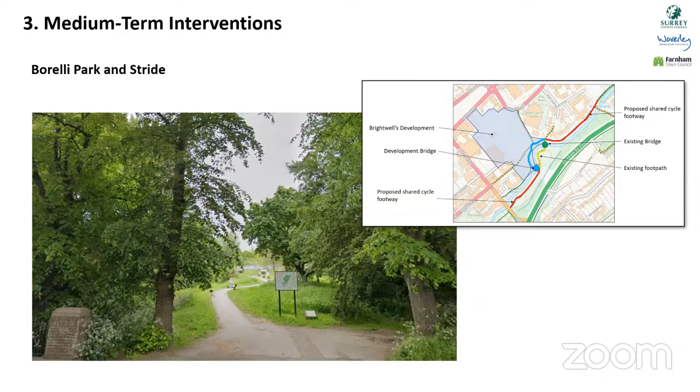Thank you. For those who don't know me, my name is Duncan Knox, Road Safety and Sustainable School Travel Team Manager, and it's the mission of my team to reduce death and injury on Surrey's roads and promote more walking and cycling to school. We are currently working on a review of our 20-mile-an-hour speed limit policy, and we'll be bringing a report to Cabinet in the next month. That's as much as I could say about it at this time.

Yes, I'd be interested. There will be some proposed changes to the way that the scheme operates, and they will go through the regulatory process first, through the council or through cabinet. But I think what Duncan is saying is that there is a much wider review now of the rollout of 20-mile zones across the county, and I'm sure that Farnham will be included as part of that review.

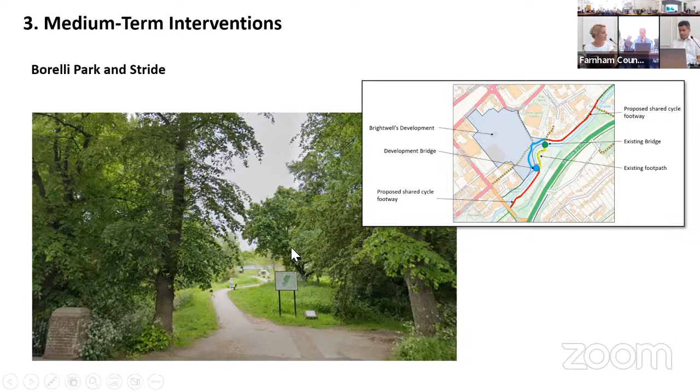Does that mean a revised planning application for the bridge will be coming to Waverley at some point soon?

Yeah, it's being discussed with Dawn White, but I don't think she's online. She's online, so it's more Dawn who can answer. So yes, we've seen some recent designs, and I know Farnham and Waverley have reviewed them as well. We're hoping that it will be a revised application coming forward.

Yeah, I think that's another conversation. It's slightly complicated around the planning basis, and commission. We would need various boundaries around that conversation in the future. But I know that local parties are interested in the final design of that bridge, and we're working towards that solution.

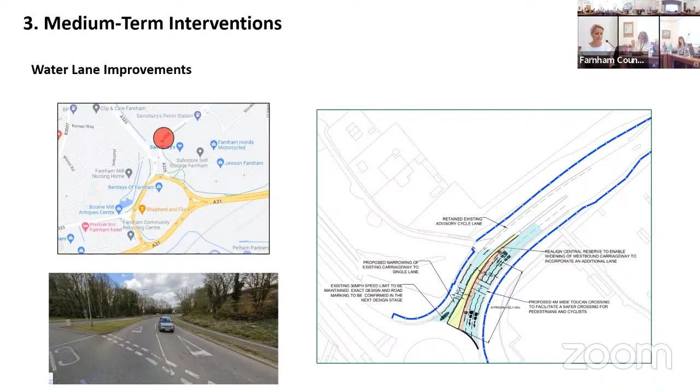Thank you. Okay, so swiftly on to town centre improvements. The team in the background have been working really hard on a lot of activities since the last board. We were tasked with carrying out some modelling on the options being outlined. Since then, we have redesigned the Brightwell development drawings for the East Street section 278, and they've been passed over to the planning teams. We also carried out design of key junctions, which was the purple area of the plan discussed at the last board.

We carried out some strategic traffic modelling on options, the hybrid options V and Y, and we've also carried out some microsimulation modelling, which is the close and more detailed modelling of the hybrid options. The teams are going to discuss their findings shortly.

But I'd like to start by drawing your attention to the optimised infrastructure plan and the vision that the people of Farnham signed up to. The key objectives of this were to rapidly reduce carbon emissions, ensure well-connected communities, support the economic vitality of Farnham, and improve the quality of place. As a reminder, nothing's been done in Farnham for a generation, and this scheme is making the town a better environment for the future generation and the climate challenge that we have.

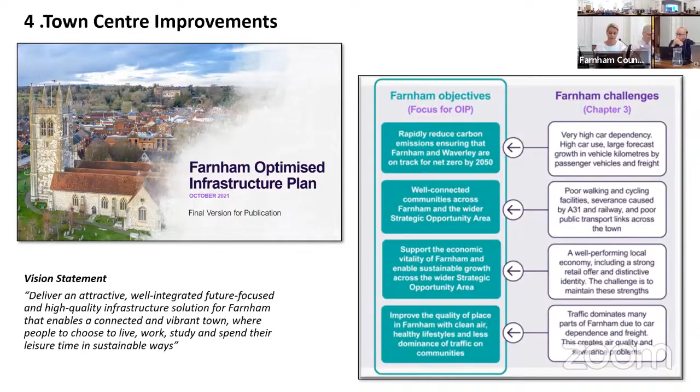As a reminder, the Surrey Local Transport Plan, also called LTP4, was adopted in July 22, and it has a hierarchy of sustainable travel with prioritisation of walking and cycling over less sustainable modes, such as a car. I will now pass over to our design team and our modelling teams to give a brief insight into the design and modelling outcomes.

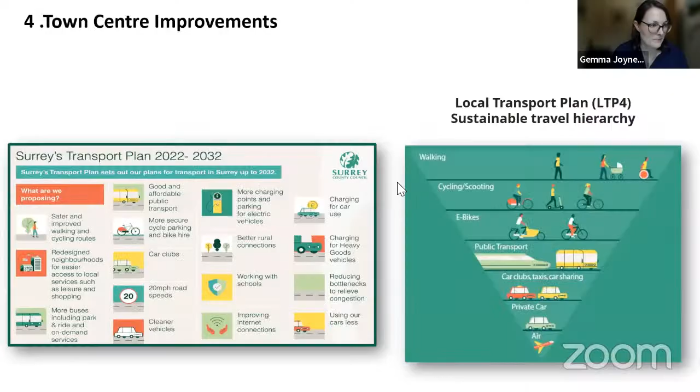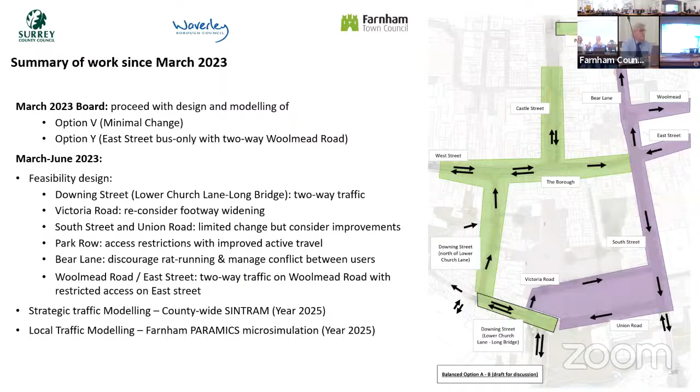Okay, thank you. So I will pass over to Gemma to talk about the strategic modelling shortly. But to start off with, just to summarise what has happened since the last board, I think Elaine's covered it in part, but just as a refresh.

So we were asked to look at the design and modelling of two options, V and Y. V was called minimal change, perhaps a little bit of a misnomer, but minimal change perhaps on South Street and Union Road, but change on Victoria Road, East Street, and around the Woolmead Junction. And Y was the option whereby there would be a two-way Woolmead Road, and East Street would be buses only, although we would still have delivery and servicing vehicles on East Street as well. So just to recap, those were the two options.

So in terms of design, what we've looked at is making the section of Downing Street between Lower Church Lane and Longbridge two-way working for traffic, instead of one-way as it is now. Reconsidering the footway widening, or providing the footway that's missing on the north side of Victoria Road, to provide better connections between Brightwells and the rest of the town. As I said, looking perhaps at limited change on South Street and Union Road, but considering what could be done at the South Street Union Road junction, to look at access restrictions and improved provision for active travel on Park Row, to also address some of the safety issues there with vehicles and listed buildings.

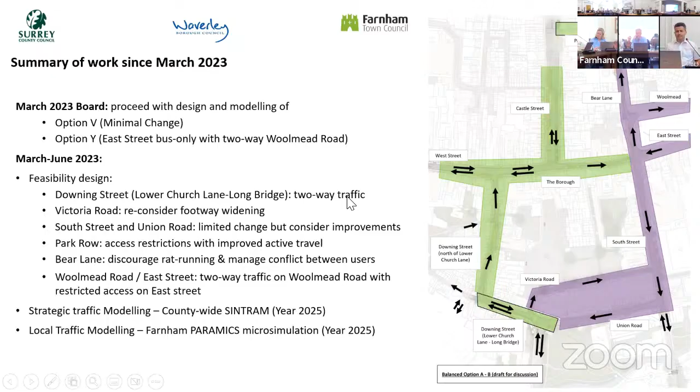We move to the next slide, please. I'm going to touch on the design. So we're going to go through design and then the two different types of model. On design, I think the drawings have been distributed to board members already. So if you've had a chance to look at them, perhaps they don't come across too well on the slides, but I'll just cover them anyway.

So on the left-hand side there, we are showing Downing Street, Union Road, and Victoria Road. So what we've got there is the new two-way working that allows people to come to and from the Wagon Yard car park in the direction of Longbridge. We have Victoria Road with footway widening and a new piece of footway, because there isn't one at the moment, on the north side of Victoria Road, which connects the car park and opens up the rest of the town centre. We have a new junction, so traffic lights at the junction of Longbridge, Union Road, and Downing Street.

That's traffic lights with some crossings for pedestrians, particularly at Longbridge and Union Road. And we have a minor improvement at South Street, Union Road, which is to ease the turning movement for large vehicles from South Street into Union Road. Because at the moment, I think that's where the guardrail gets hit, not destroyed, but impacted. So that should help from a safety point of view.

We've insisted on putting traffic lights there because we've had feedback from consultation that we should essentially put the lights in. If we move to Park Row and Bear Lane... just check whether anybody's got any questions or queries. Okay, I'm happy to be stopped if I'm moving too quickly.

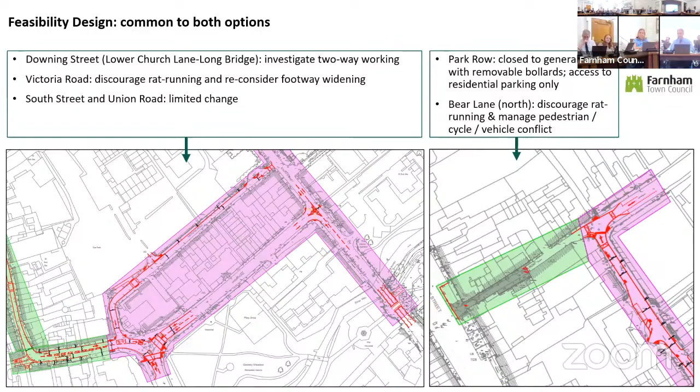Right, sorry, the next slide then. So the previous slide was showing elements of the comments about options V and Y. This slide is showing essentially the differences between V and Y. So V, as I said, retains the one-way traffic on Woolmead Road and retains, pretty much all of it, the East Street redesign that was put together for the purposes of section 278. So we've looked at how that ties in to the proposals for Woolmead, with the footway and improved crossings already developed there.

So that's option V. For option Y, we have looked at how to make Woolmead Road two-way, the changes we need to make to accommodate two-way traffic on Woolmead Road at the junction, and the changes at the other end of East Street, the junction of Dogflud Way, where we're proposing traffic lights with crossings for pedestrians. Again, trying to retain as much of the East Street section 278 scheme as possible, which pretty much stays unchanged, but its use changes because it becomes buses only with some delivery and service vehicle access. So the traffic change will be substantially bigger.

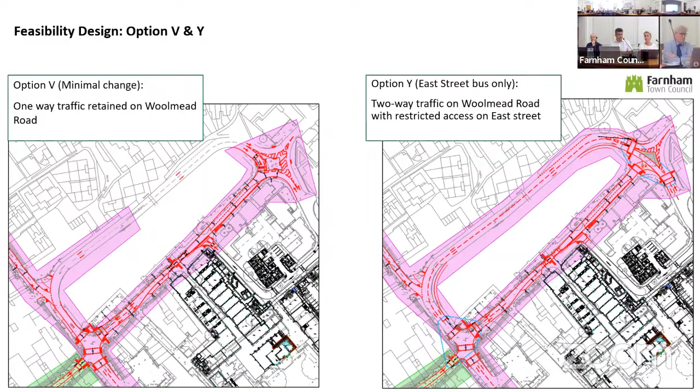Okay. If we move to the next slide. So the final thing to say on the design. For the last 3 months, we've effectively been looking at design, it feels like, for half the town centre. Because we've been looking at Downing Street, South Street, Union Road, East Street, and Woolmead Road.

Of course, we still have the proposals for the rest of the town centre, which is the main part of Downing Street, the Borough, and Castle Street. So it's just really a reminder of that, using some of the images that we used for the consultation to say that overall, what the hybrid options are

giving us are those wider pavements for pedestrians, particularly to help people with wheelchairs and pushchairs, new and improved crossing points at various places, including here at the top of Downing Street, raised crossings at various streets, loading bays to make sure that loading doesn't block traffic as far as possible, and planting, greening, outside dining, and seating. And the last one, I think, is those

shorter driving routes for people from North Farnham to get to the Hart car park and South Farnham to get to the Waggon Yard car park, because we've made part of Borough two-way and we've made part of Downing Street two-way. As well as shorter driving routes, that helps us reduce the level of traffic on parts of the current system. People don't have to go all the way round; they simply get a shortcut that way.

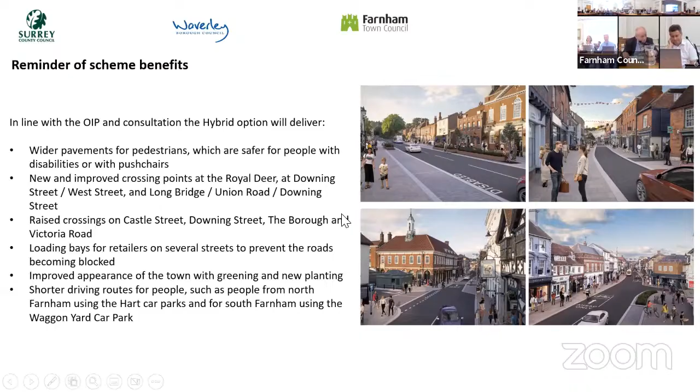Okay, Chris, was there anything else you wanted to add? No, thank you, and it's generous. Yeah. Totally. Hey, Gemma, you're on. Hi everyone.

So transport models provide a lot of information, and the following slides that we're going to present provide an overview of the results which best illustrate the potential impact of these options. We're using the PM peak as an example because it has the greatest increase in delay with the options. Here is the predicted change in traffic flow in 2025 along key routes from the SINTRAM county-wide model.

The red and orange colours denote an increase in vehicle flow in option V compared with no scheme, and the green colours show a reduction in vehicle flow. Orange and bright green show a smaller change in vehicle flow of within 60 vehicles per hour. It can be seen that the biggest changes to vehicle flow are in the town centre and along the A31. Further afield, there is route switching as a knock-on impact of the changes to the town centre and the displacement of traffic, the majority of which, however, produces a net change of less than 60 vehicles per hour.

In the town centre, there is a general reduction in vehicle trips, especially the Borough, that sees approximately a 40% reduction. Any increases in the town centre relate to where new routes are available. For example, the westbound carriageway between Castle Street and West Street, which introduces two-way travel in this option along this section. The A31 absorbs some of these displaced vehicles, with increases of up to 15% in the eastbound direction during the middle of the day and during the PM peak.

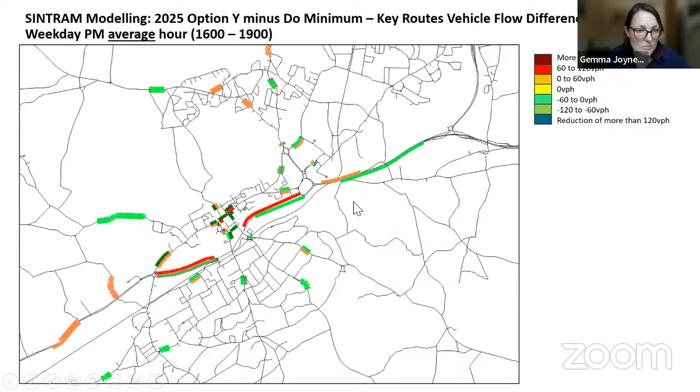This slide presents the same, but for option Y compared with no scheme. As you can see, the vehicle flow difference results in 2025 for option Y are similar to option V, with the exception of Woolmead, which enables two-way travel in this option, and thus seeing an obvious increase in trips in the westbound direction, and a reduction in vehicles travelling along East Street due to this section of road being restricted to buses and access only. In the AM peak and during the middle of the day, there are more vehicles using the bypass in each direction, but the differences remain localised.

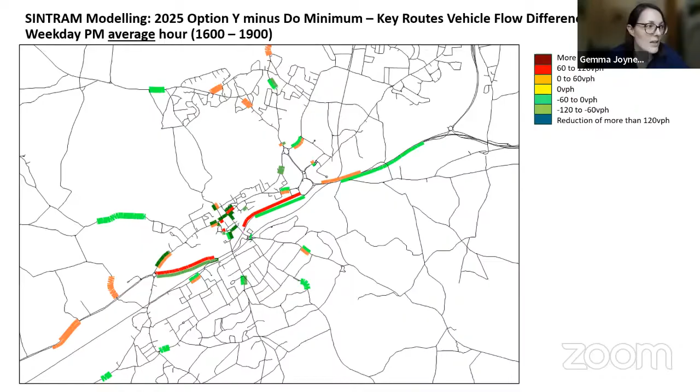The SINTRAM model also enables us to estimate the impact on travel by other modes of transport. It is estimated that bus passenger numbers will reduce by a small amount due to increased journey times, although they reduce less in option Y due to East Street being bus only. And the model does show more people will walk and cycle with the options. Next slide. Thanks.

Okay, thank you. You can be back with me because we're now going to cover the more local Paramics modelling. So the two sets of modelling are not done in isolation. The predictions in terms of what happens to the traffic that Gemma's just spoken about get fed into this modelling, which then predicts what happens at the various junctions in and around the town.

The model is suggesting that journey times will increase by 1 to 2 minutes based on a do minimum journey time of about 8 to 9 minutes. That's with option V. With option Y, the increases are slightly more than that. Okay, so the reason we're getting these results is a combination of the change in flows and the change in capacity of traffic in the town centre, because we're taking space from vehicles and lanes and giving it to people.

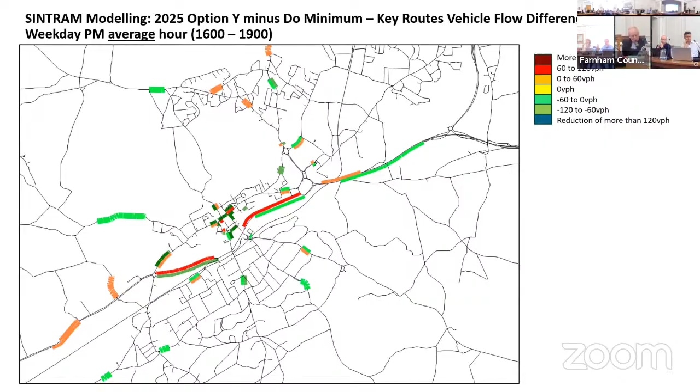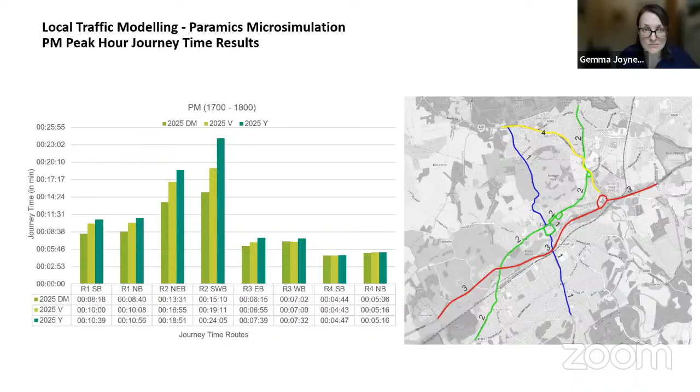It's an incredibly complex area, and that's why the transport modelling is needed to try and understand the potential impacts of these changes, and exactly what Chris has just said about it being a balance.

Could I make one more point? I think the value of the models, as Elaine has reminded me, is being able to compare and contrast the options and try to make decisions about the relative merits or drawbacks of different options. I think that's an important point.

I think we have to recognise that the changes are going to result in less road capacity, but on the basis that that's going to be beneficial in terms of reducing air pollution and making it safer and more attractive for people to cycle and walk. So part of this whole exercise is to try and persuade people to change the way in which they travel around the town.

I think we have to recognise that there will be an impact with these changes, and the modelling will provide some sort of guidance. If the models showed it would add 30 minutes to the travel, that would be a concern. But there's a balance between science and art, isn't it? It's helpful to know that broadly speaking, there won't be significant increases in travel time. But a key part of this for all of us is to sell the wider benefits of the scheme to the residents.

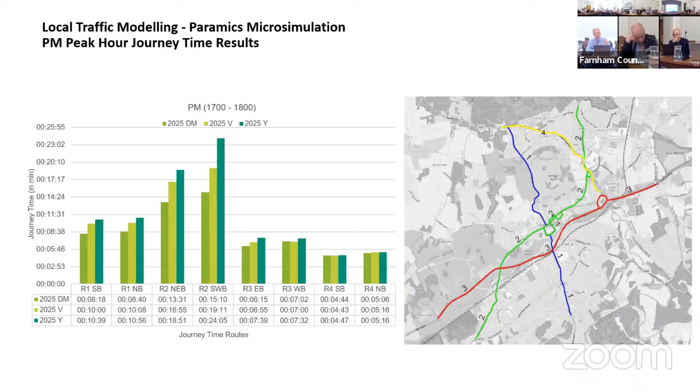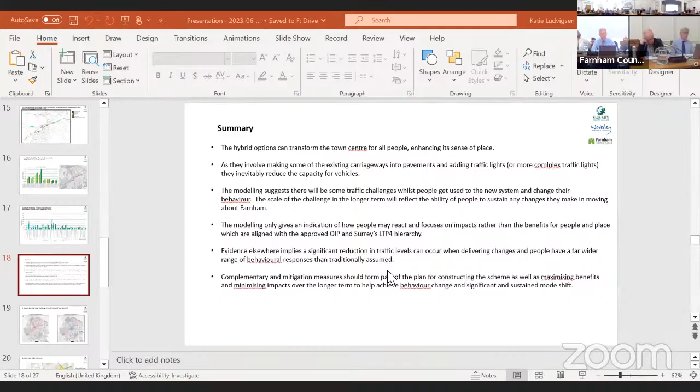I personally have a real desire for this to be part of it. There's the driving and doing things we take care of for drivers, there's cycling and walking, but we also have to be realistic: unless there is some form of reliable, sustainable public transport, it's going to be very difficult to persuade some people to change their behaviours. The pilot involved has been incredibly successful, particularly where you don't want a car at the other end of the journey - going to hospital appointments, the doctors, or the train station - quite apart from just doing short journeys around the towns. So the planned rollout will start in September, and that will be part of that overall transport plan. Okay Chris, is there anything else on this before we move on?

Well, I was discussing the various aspects of modelling. We tried to clear the mind and come up with a summary, but I think we've all covered it in discussion, to be quite honest.

The hybrid option to transform the town centre for people involves taking space from carriageways and creating pavements, or adding traffic lights to help people cross the roads, so it inevitably does reduce capacity. There may be some traffic challenges, but this is about transforming Farnham for the future, creating a better place.

As we've said, modelling only gives an indication of how people react and focuses on impacts rather than the benefits, which will align with the OIP and the LTP4. I don't want to go into too much detail, but there is some evidence from the delivery of other schemes that suggests people have got a bit more capacity to change their behaviour than is suggested by modelling.

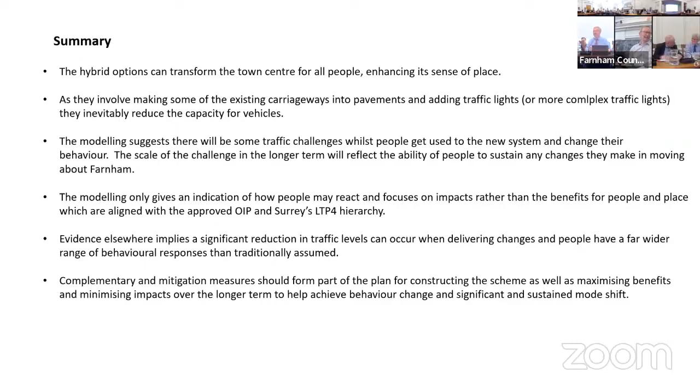Okay, good. Right, and I think then we're ready to move on to the other item.

Thank you. So since we last met, the LCWIP work was endorsed by the Farnham Board, and the report went forward for formal sign off from our cabinet member for transport infrastructure and growth, Matthew Furniss. I'm going to pass over to Neil McClure to speak on this item.

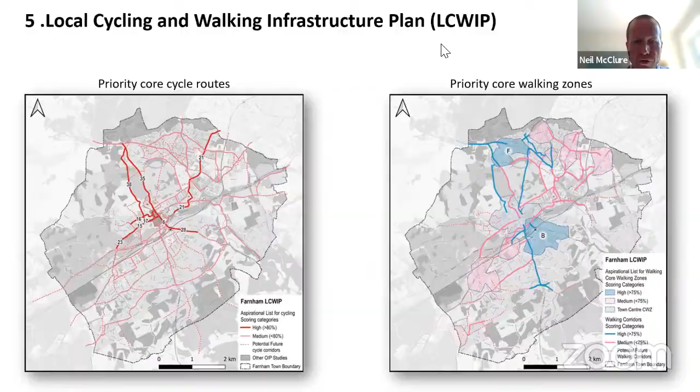Thank you. Good morning, thank you Elaine. Should we just share my slides as well? I think you have to, if you remove yours. I think you've just got a couple of slides to set the background to what we're talking about.

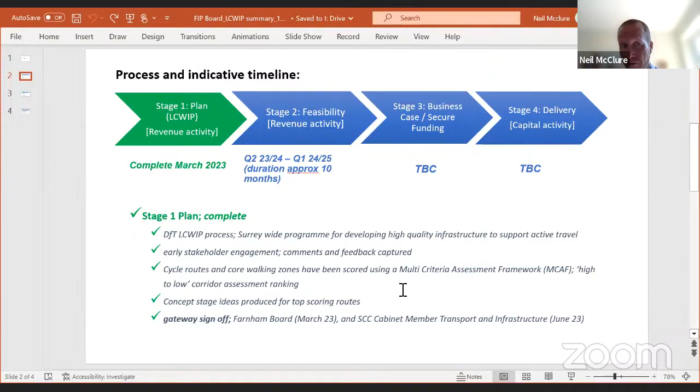In terms of the next step, which we're going to come on to, is to set the scene for what the top phase 1 routes are that we're then looking to take forward. The concept stage ideas produced for those top scoring routes are available within the LCWIP report. And as Elaine said, the gateway sign off, which takes us through into stage 2 feasibility, is now in place as of earlier this month, where our cabinet member did the final sign off after the Farnham board endorsement earlier.

So importantly, where we're at now is the stage 2 feasibility design development stage is ready to commence. It's a revenue activity, and this is all about the priority schemes taken from within the plan. There are a high number of routes within the LCWIP plan, but over the 10+ year period that LCWIPs are pitched at, along with DFT, there has to be prioritisation. There's a realism of what we can take forward, and then what we can look to secure funding for.

The revenue activity - I'm pleased to say, I don't think this was known last time - we have a 100k allocation from the strategic infrastructure programme at Surrey County that's allocated to the Farnham plan, and that's in addition to the money already agreed between the borough and Surrey for the Waverley plan. So there's positive news on that side of things.

But the key point we're on to here is the Farnham Active Travel Working Group, which was agreed at the last Farnham board, to now prioritise the routes from within that plan and select the cycle routes and core walking zones that we are taking forward into this stage 2 feasibility activity - that's the piece we are now at.

So the action after this meeting is we need to confirm the key stakeholders that are going to be included in that workshop, and then, absolutely importantly, get the data in and move forward with this work into the actual feasibility stage.

Provisional timeframes here: we're looking at July, hopefully, subject to availability and confirming the stakeholders we're looking to invite, which we can follow up outside this meeting, with the view that after the workshop is complete, we'll have the prioritised list of routes.

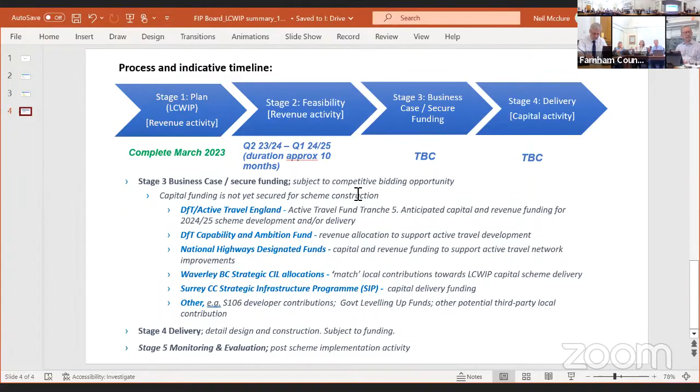I think we probably need to discuss this, because this is the first time this has come up and we've been made aware of this schedule. So we will now have to work with you to work out how we integrate the consultation meetings, which we still think are important, to identify the constraints missing from the report and the gaps in it, to make sure we really deliver the value we're saying we're going to. We want to work with all stakeholders in the town, because that first phase didn't include a lot of people who were really interested in being engaged. But we need to give them a voice, and that's our job as Surrey County councillors.

Okay, so Neil, we'll take this offline and sort out the details. I think Catherine, you were looking at four meetings, so we need to make sure those are tied in. I'll leave you to do that piece of work, and make sure the local stakeholders attend at least one meeting, if that's okay. Was there anything else? Thank you, thanks Neil.

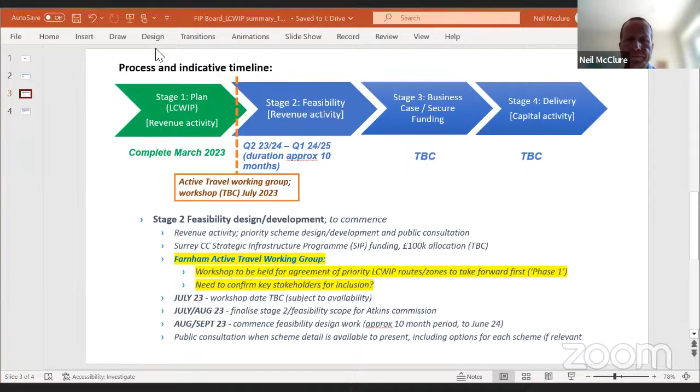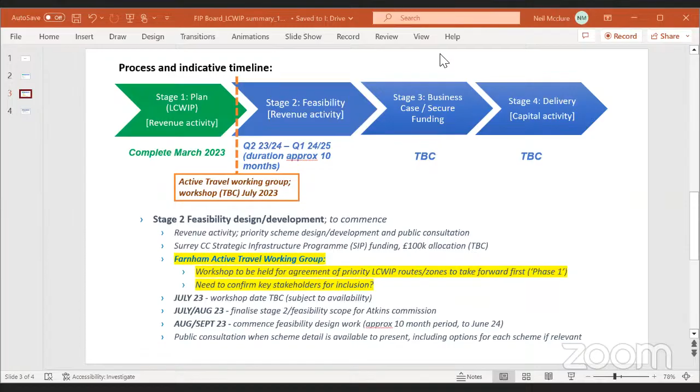Oh, sorry, Neil, can you stop sharing the screen? Thank you. Sorry, I'm trying - have I gone? Is it gone? No. Stop sharing, I can do it. Sorry, yeah, thank you, sorry. That's it for that, I think.

So I think that's everything on the Atkins work. So we go on to item 6, which is the A31 corridor.

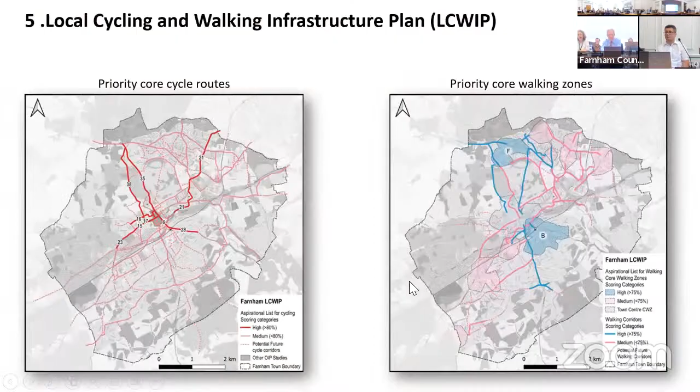We're now going to work with somebody in Treasury. Good - I think the main thing is that it's on the approved side, not the reducing side. There's obviously other competition happening behind the scenes, but we will get there. Okay, anything else on that?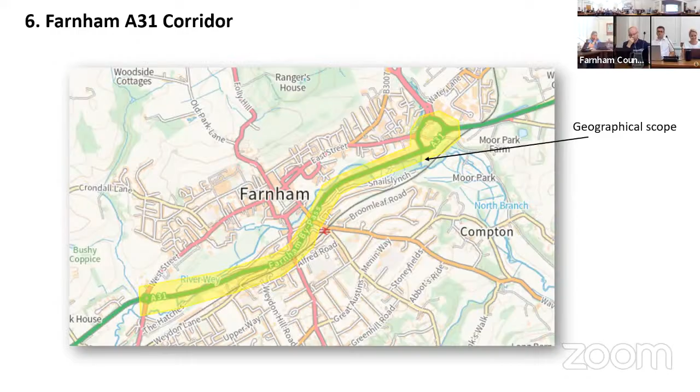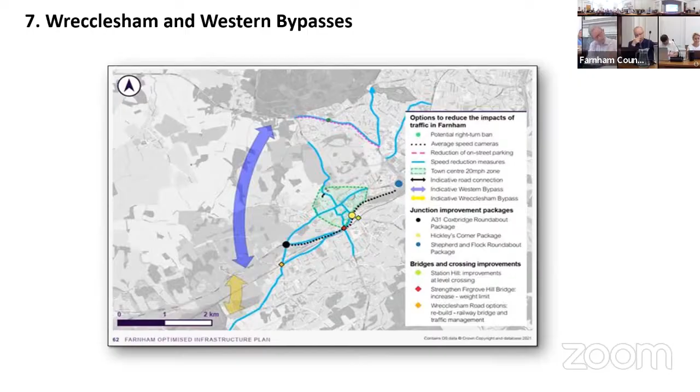No, thank you, then we go on. So really just an update - we've still got the environmental and cost report drafted by Atkins, but we're currently reviewing the next activity for this.

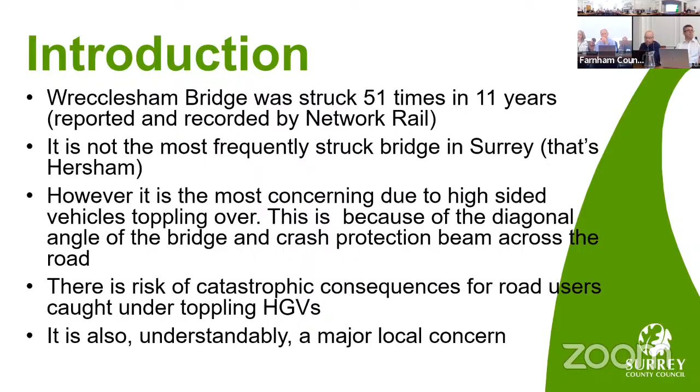So this is a presentation on preventing bridge strikes at Wrecclesham. By way of background introduction, Wrecclesham Bridge was struck 51 times in 11 years. It's not the most frequently struck bridge in Surrey - that's in Hersham. However, it is the most concerning because, as we know, it's diagonal across the road, so when high vehicles hit it, they have the risk of toppling over, which is a big concern I'm sure you're already aware of.

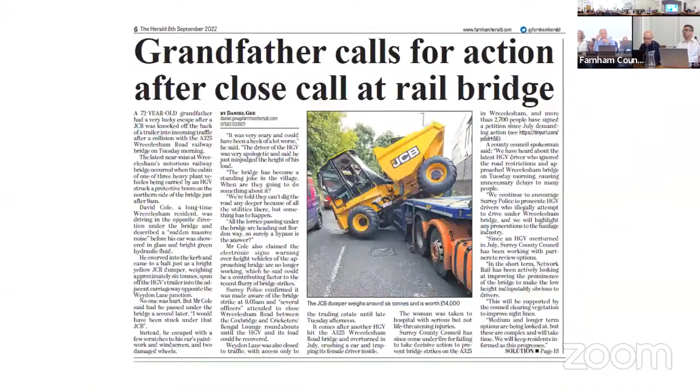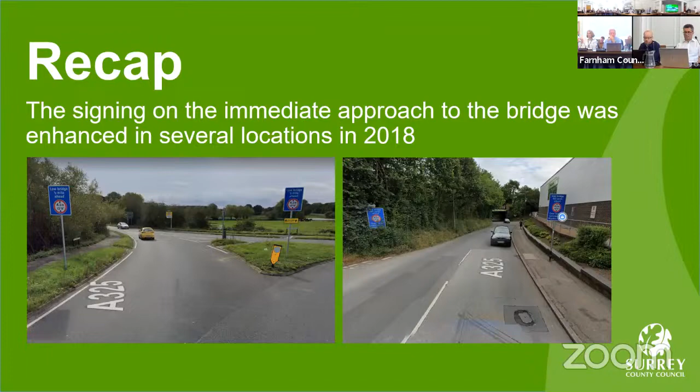So for those who don't know where we're talking about, that shows where we are - I guess everyone mostly does. Just a recap of what we've done as a county council highway authority already: we implemented additional signage on the immediate approaches to the bridge at several locations in 2018 to warn drivers of the height prohibition. There were also signs put in a long time ago, around 2014-2015, highlighting an alternative route to avoid the bridge, following black squares or black triangles.

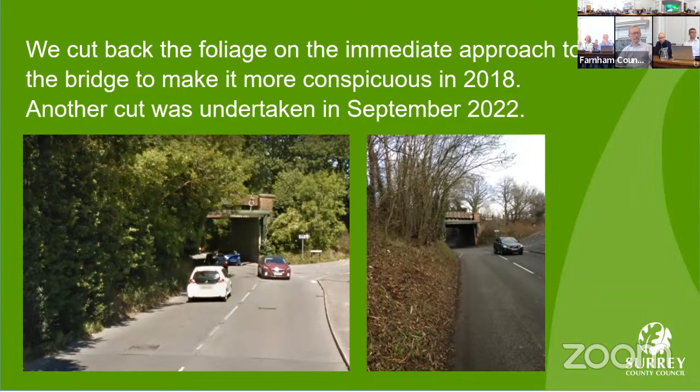I think foliage has been an issue in the past as well, and we have done substantial foliage cutbacks in the past. You can see on the left how the tunnel of trees does tend to obscure the presence of the bridge to any drivers approaching it, and a cutback actually does make a difference.

We've also invested in new overheight vehicle activated sign equipment. So these signs flash up if a laser beam further up the road detects a high sided vehicle, and the signs flash up to warn of the height restriction up ahead and to either divert or to turn back.

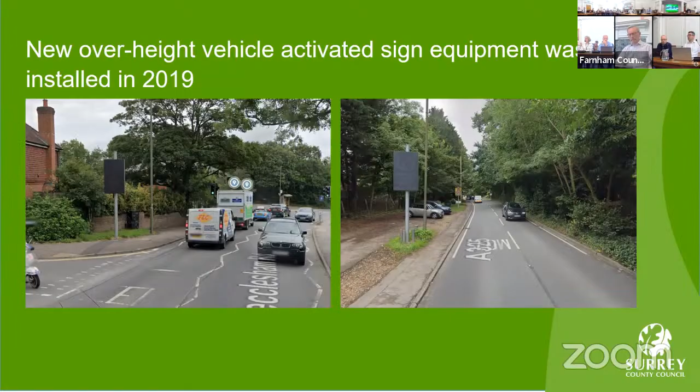One of the other things we've looked at is the possibility of amending the diversion routes. So there's planned diversion routes for when the A3 is receiving works, or the Hindhead Tunnel, for example. That's when they put out temporary yellow signs on A-frames throughout the road network. And we've agreed already with National Highways and Hampshire County Council that on those pre-planned diversions, that route will be via Hampshire rather than through Wrecclesham.

But there is those black triangles and black squares and unplanned diversion routes, which currently takes you through Wrecclesham. And then if you're a high-sided vehicle, there's another diversion by Echo Barn Lane. So you have to be fairly switched on in some respects as a high-sided vehicle driver. We don't know for sure if any of these bridge strike incidents are actually associated with the high-sided vehicles diverting from the A3. And we don't have a lot of evidence that it is,

but just in case, it's, I think, worth doing. So we've agreed with National Highways that they will fund a change to that unplanned diversion route to go via Hampshire, and Hampshire have agreed that too, so long as Surrey lead on the design, that will be funded by National Highways. And that's quite a substantial job, with probably something in the order of 100 signs between Guildford and Liphook to change via Hampshire and implement. So that's not going to happen quickly, but it will happen, and we've started work on it.

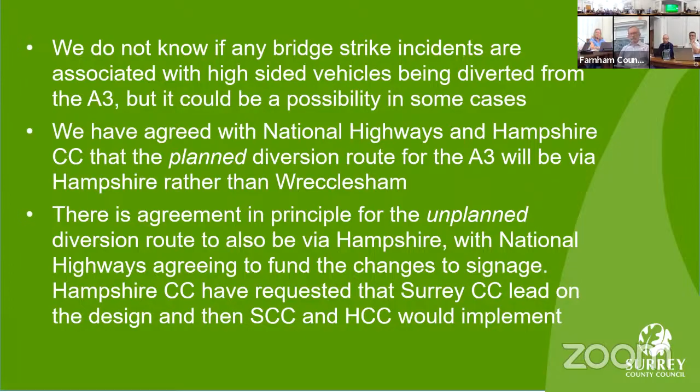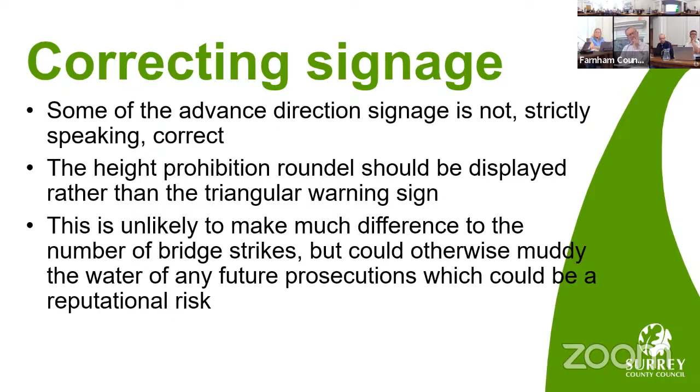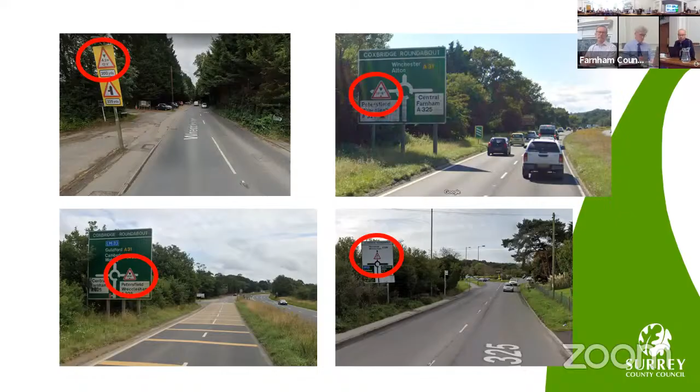Some of the advance direction signage is not strictly speaking correct. We should be showing the height prohibition roundel rather than a triangular warning sign. I don't think that's going to really make much of a difference, but it could muddy the water if there is any prosecution. So just for interest, the triangular warning signs should only be used at arch bridges, not at flat bridges like Wrecclesham. It should be a prohibition roundel rather than a triangular warning sign. So we're going to get those updated anyway.

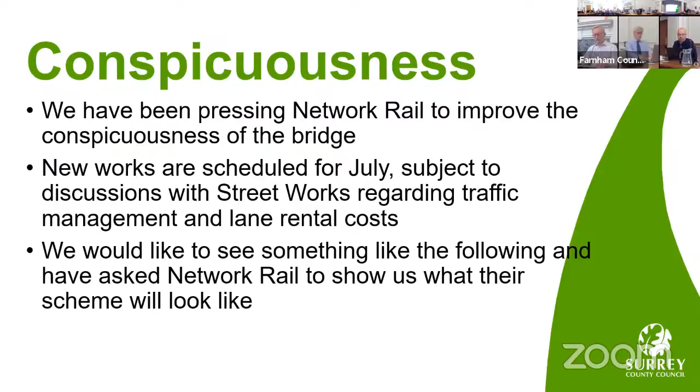This is a long word to say, conspicuousness. But what we're trying to do is make this bridge brighter and easier to see. And we've been pressing Network Rail to improve the conspicuousness of the bridge. And we've got some examples from elsewhere that we would like them to do. And we've been asking them to do this for some time. They have got a road permit for the 3rd of July.

So works will be taking place, and we've asked for some more details as to what exactly they're going to be doing. And so far, I understand they're going to be painting the bash beams yellow and maybe putting some sort of black and yellow chevron signs. I don't know to what extent, but what I would like to see is something like this, ideally, and we'll be pressing them to tell us what it is they're going to do exactly.

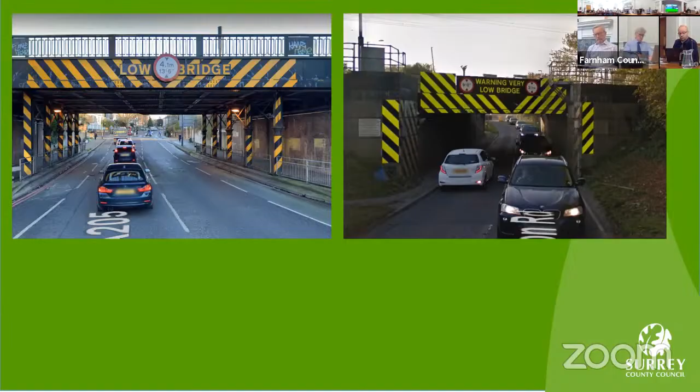So what else did we do? We've commissioned our colleagues in Atkins to look at what other options there might be. So first of all, they looked at eliminating the risk completely by lowering the road. And that obviously would work 100%, but it is a big deal. It is a very difficult engineering project to conceive of, with structural and utilities under the road. Earthworks, foundations, it's a Network Rail bridge, so we have to collaborate very closely with them, and of course there will be significant disruption during construction.

There's an estimated cost of 8.2 million that our colleagues in Atkins have estimated. I think we'd have to have a double check on that, and of course I wouldn't be surprised if it ends up being a lot higher with such a difficult project, with things like an electrical substation nearby and embankments to the roads, some retaining walls for the roads nearby as well, Weydon Lane, for example.

So other options that were looked at. Atkins considered putting in some perpendicular bash beams on the approaches to the bridge. So that wouldn't stop the bridge strikes, but it would stop the trucks from toppling over because they'd no longer be hitting a diagonal bash beam.

To implement that on the south side of the bridge, there would have to be a new footway build out to accommodate that new bash beam, and the foundations for it. And because that would be quite a sharp turn, that would have to result in a left turn prohibition into Weydon Lane, because it would be too acute for most vehicles. And we currently know from surveys that about 500 vehicles make that turn each day. And because it'd be so acute, it might not be possible for larger vehicles to turn right out of that road either. And that would cost about 2.2 million.

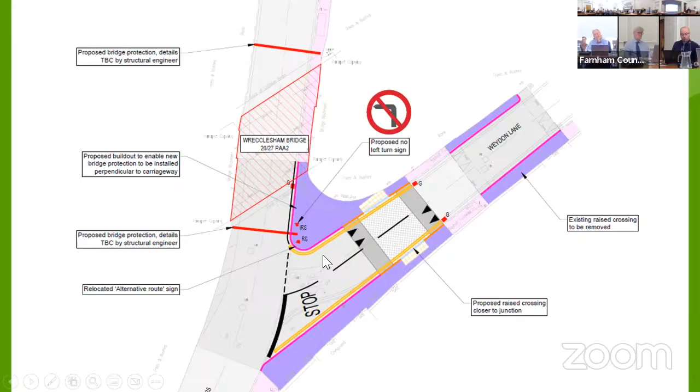So that's what it looks like in plan view. So you can see the lilac coloured build out to accommodate this new red bash beam in advance of the diagonal bridge. And there would be no left turn for southbound vehicles turning left into Weydon Lane, because that would just be too acute. What would it look like on the ground?

So I think there's a lot of concerns over that, and it doesn't completely solve the problem, in that there will still be bridge strikes. I think there could be problems for pedestrians crossing the mouth of Weydon Lane, because you've suddenly got a great big pillar. Weydon Lane already has a stop line rather than give way, because the visibility is quite substandard to the right if you're trying to emerge out of Weydon Lane. A big steel column there would make that much worse too.

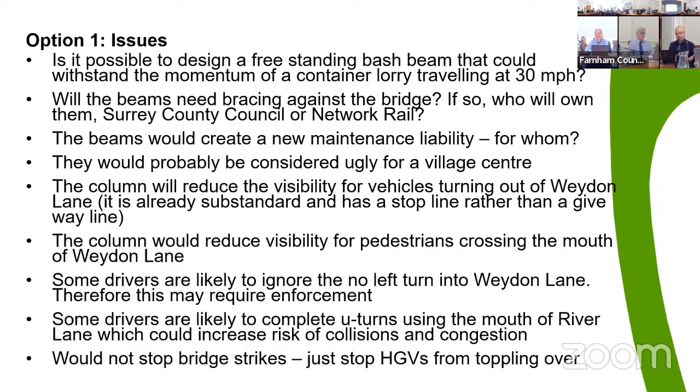And I think some drivers are likely to ignore the no left turn ban. We can put a no left turn sign up, we can try and enforce it, but people will ignore it, and they will try and do a U-turn, I think, via River Lane, as shown here. And as I say, there's about 500 vehicles doing that left turn a day at the moment, and that could have unintended consequences. That road layout isn't designed to take 500 vehicles doing a U-turn like that.

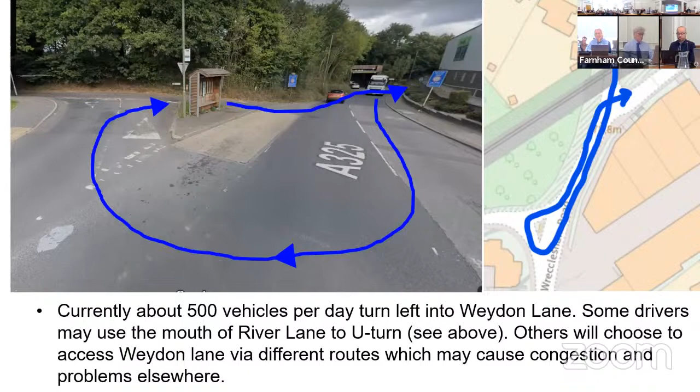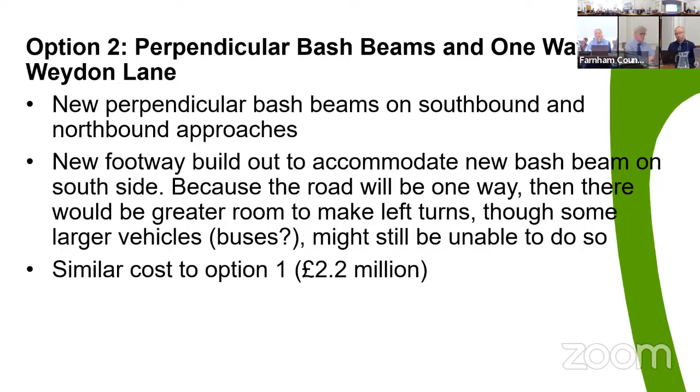So the next option that was looked at was the same kind of layout with perpendicular bash beams, but to try and address some of those problems turning out of Weydon Lane would be to make Weydon Lane at that end one way. So that's what that would look like. So you wouldn't need to have a left turn ban anymore, because any vehicles turning left would be able to swing out right across the width of Weydon Lane without having to worry about any vehicles coming the other way, because it's one way into Weydon Lane, if you follow.

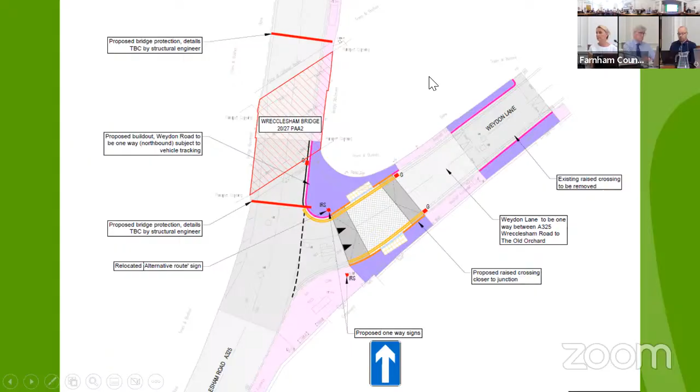However, some of the same problems apply, in that the one way for Weydon Lane is likely to displace traffic from that manoeuvre onto other nearby residential roads. So nearly 800 vehicles per weekday travel southeast out of Weydon Lane, and they won't be able to do that anymore because it would be one way into Weydon Lane, and they'll be finding alternative routes on those other local roads. And again, it wouldn't completely solve the problem. It would just stop the HGVs from toppling over.

Another option that was considered was to implement traffic signals for the junction just to the south of the bridge, with the junction with Weydon Lane, and have a perpendicular bash beam on the southbound approach. And the aim of the traffic signals would be so that there would be only one way working under the bridge. So if a vehicle did topple over, it wouldn't strike anything coming the other way. However, that doesn't protect pedestrians who might be walking under the bridge. And the aim would also be to reduce speeds, but I'm not sure that it's the best option really. There's a number of problems with it.

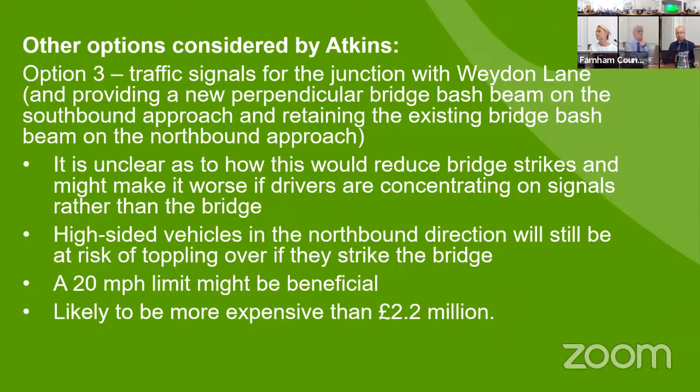They'd be toppling over onto where potentially pedestrians would be waiting to cross the road, pushing the push buttons across the road, and damaging the signal head. Thankfully, no one was actually stood there. So I don't think that solves the problem.

And if the lights were green, we're still going to have vehicles heading towards that at 20 to 30 miles per hour at least. And there will also be a lot of congestion and problems associated with that layout too, by introducing traffic signals on that main road.

Another option considered by Atkins was to install priority give-way islands, so vehicles can only travel under the bridge one way at a time, rather than traffic signals. Again, I don't think that would solve the problem. It would make sure there was only one vehicle at a time going underneath, but if the vehicles were travelling in that direction, they could still hit the bridge and topple over, and there could be pedestrians walking through there.

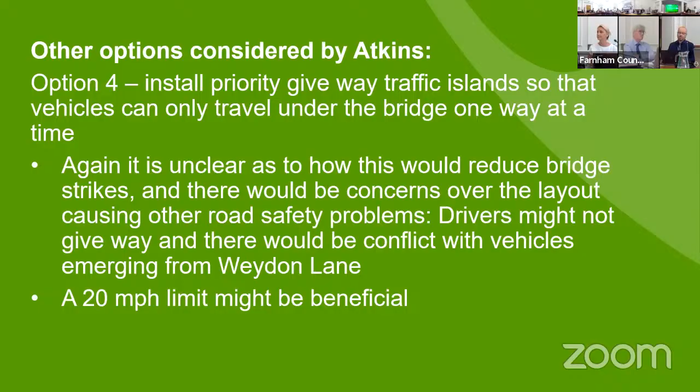There's also a problem if you're travelling northbound. If you were to go over to the other side of the road because you find a gap in traffic coming the other way, what if there was a vehicle turning left out of Weydon Lane? You'd be hitting each other head on, and the drivers coming out of Weydon Lane would mostly be looking to the right for any southbound traffic in order to find a gap, turning left and suddenly encountering the vehicle going northbound around this island. So actually, I think that's a non-starter.

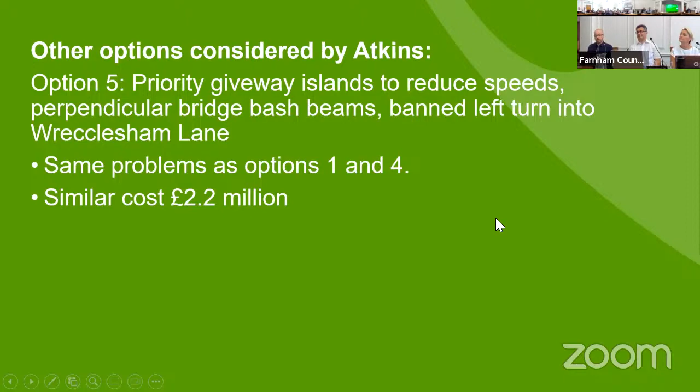So another option was a combination: the priority give-way islands and perpendicular bash beams and a banned left turn. But I think that doesn't really solve it either. So that's what that would look like. I can't see us having those priority give-way islands. I think they cause too much of a problem, as just described.

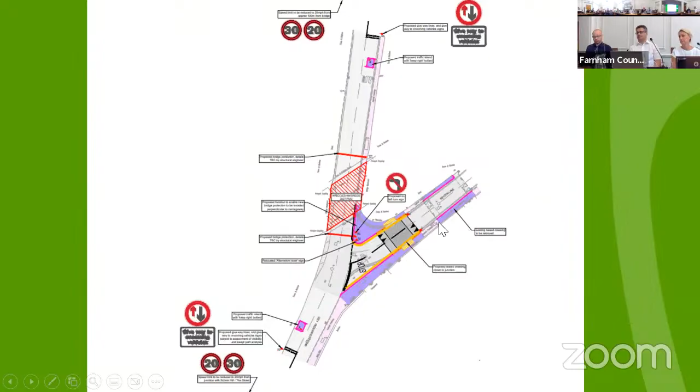So what's the way forward for us as a highway authority? I think it's worth remembering, first of all, that legally, the liability lies with drivers who are making these mistakes. It's not the county council who will be taking responsibility for these mistakes. However, of course, we've got a moral duty to do whatever we can to mitigate the risk and do what is reasonable.

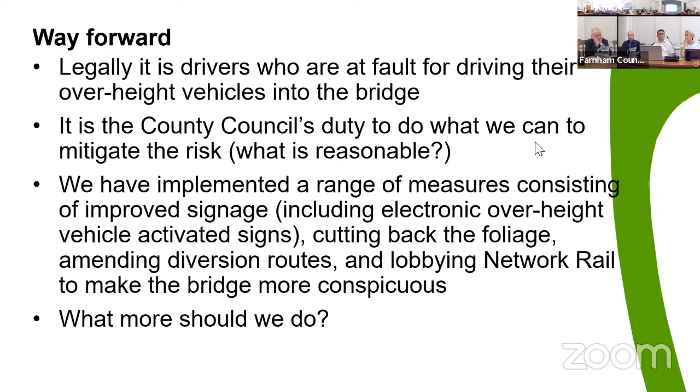Now, so far, we've implemented a whole range of measures, including improved signage, electronic signage, cutting back the foliage. We're going to be amending the diversion routes, and we're lobbying Network Rail to make that bridge more conspicuous. What more can we do? Well, I think it's problematical to justify spending 8.2 million on lowering the road at one location compared to spending that money elsewhere. Is it worth investing something in the order of over £2 million on perpendicular bridge bash beams to stop the HGVs from toppling over?

I think there are a number of problems with those options. It was necessary to look at them, to consider them, but because of the problems highlighted in this presentation, I think they would not be worth pursuing, because it doesn't completely solve the problem and causes a whole set of other problems.

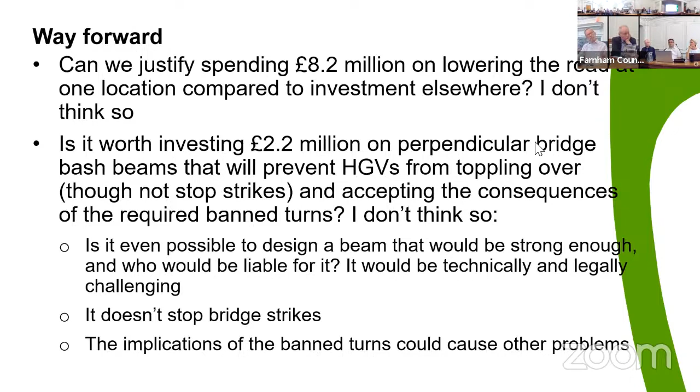So for me, my recommendations are that we implement the amendments to the unplanned diversion route. We continue to maintain the foliage to a high standard. We make those slight corrections to the triangular warning signs to make them prohibition signs. We lobby Network Rail to make that bridge as conspicuous as we can possibly make it. But I think we should be considering a 20-mile-an-hour limit through there.

Now, our current policy requires that with existing speeds in the order of 30, traffic calming would be needed to make that successful. But that's not the kind of road where traffic calming would be generally acceptable, and the 325 carries quite a few larger goods vehicles. So maybe a signed-only 20 would be a good starting point. That might even be something we'd be looking at to a greater extent in the future. I think it's important that we communicate what we've looked at and why we're rejecting those options, because we have a duty to let people know that we're trying our best and doing everything we can.

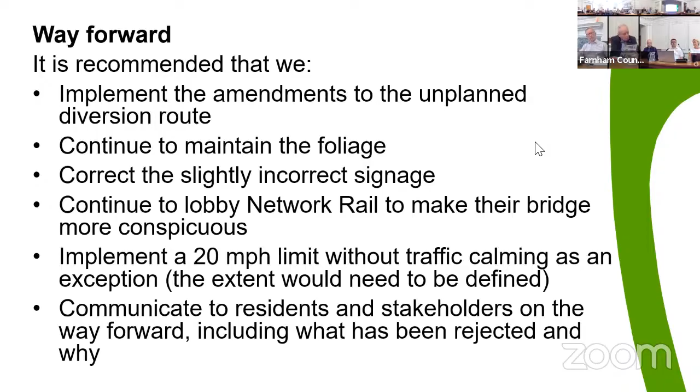Michaela, you suggested a pedestrian tunnel through the embankment. And of course, that'd be great for pedestrians, and maybe through the shared path, that'd be great for cyclists. But that's a different issue, it wouldn't prevent strikes. You could spend millions of pounds on a tunnel like that, but you'd still have HGVs toppling over, perhaps landing on a car, God forbid, or cyclists, pedestrians, or motorcyclists under the bridge. So it wouldn't solve the problem, but it is a different proposal.

Repaint the entirety of the bridge. I think there's meetings with contractors all the time to understand what that looks like. Work starts on the 5th of July. At the end of the day, this is about re-educating the drivers. I know many of those are complicated schemes and there are downsides. So at the moment, on your list, cutting back the foliage, looking at the 20 mile an hour zone policy generally, we'll do in the next few weeks, and then hopefully we'll have a much more visible outline to the bridge. I think let's get those solutions, and then we'll just have to continue that conversation. But there doesn't look to be any easy solution.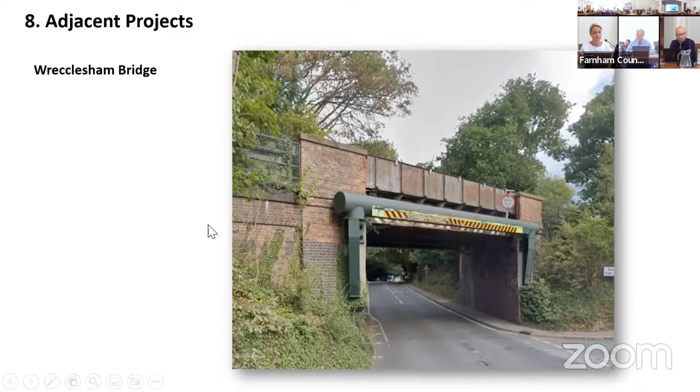We've got ongoing discussions with Surrey's maintenance teams to align the installation works with planned drainage improvements, therefore sharing the traffic management costs for the scheme. So we're reviewing costs for implementation at the moment.

Can I just draw it back quickly before we finish to the town centre scheme? Am I assuming it's option B that we will agree? So I've got a consensus from the board. Okay, yeah, I mean, the other option isn't deliverable at the moment anyway.

It would require the purchase of land, and that isn't currently available to us. So we haven't excluded that, but we shouldn't delay moving forward with the other option. I think that's the general view here. So we'll see where the conversation goes.

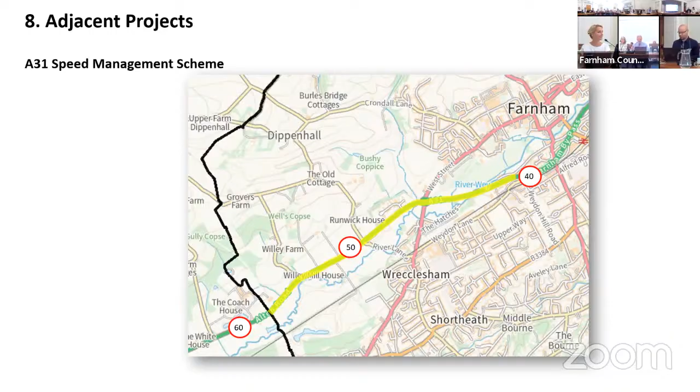All right, so yeah, anything else on the speed management, then program updates stuff - you've done all that.

So just quickly, I'll pick out the main ones. HGV - we're speaking with Hampshire for additional signage on the approach. Wayfinding strategy - we were impacted by the West Street works for road space for installation, and we're also waiting for Network Rail and Brightwells for actions. The Borelli Park and Stride, we're still waiting until we have the final bridge design, and the Farnham A31 corridor, we're still awaiting the DfT bid.

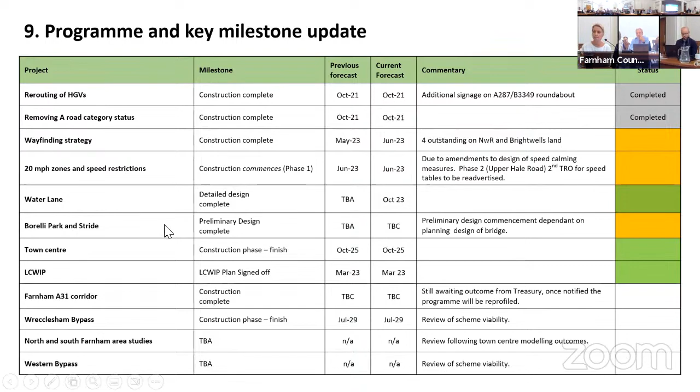With regards to risk, I don't need to tell anyone about inflation and funding. We have to be careful with scope creep as a risk, because we don't want additional work being added to the programme, and we have to make sure we're concentrating on the projects within the programme, because the finances are very constrained. And obviously, managing stakeholder expectations - there's a lot of differing views, and we have to make sure we manage them carefully on board.

Thank you, Elaine. I think managing risk, there's a lot of work, and I'm very grateful to everyone, particularly to members for all the public engagement they're doing alongside the work you're doing. I hope we're never going to have everyone 100% behind this, but I do think there is now real momentum behind the work that's being done, and genuine support for that work. So thank you for that.

So this is anybody who wants to highlight the key responsibilities. The last item was in fact questions that were submitted in advance. The answers weren't actually ready until very late this morning, so to reassure those questioners, the answers will be emailed to them, and they will then be put on the website as well, for anybody that wants to see those.